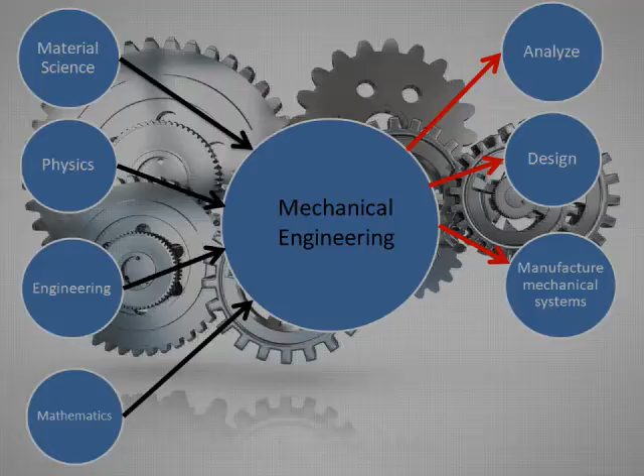As Professor Deshpande has already narrated, mechanical engineers have immense opportunities to work in various fields. I would call the role of mechanical engineers like common salt in any food. Without it, the food is incomplete.

To give you some examples, the usage of composites is the need of the hour. Composites play a decisive role in conservation of material, lightweighting, and cost cutting. Mechatronics is the technology combining electronics and mechanical engineering.

Robotics is a subset of mechatronics, which Mr. Sani Pathak has already explained in his presentation. Nowadays, we talk only about robots. It has helped mechanical engineers in reducing mistakes, resulting in high productivity, etc.

Nanotechnology, as the name suggests, is about anything small. For compact design and faultless performance, nanotechnology is used.

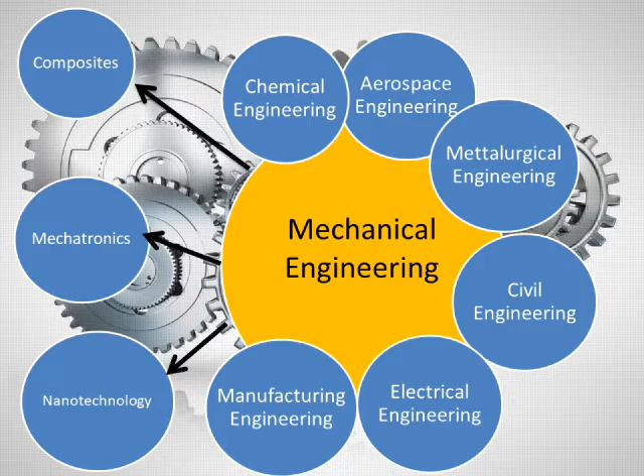If you see other engineering streams, mechanical engineers are present in every field of engineering, be it chemical engineering, where machines will not work efficiently without a mechanical engineer. Similarly, in aerospace, civil, electrical engineering, mechanical engineers play important roles.

When Dr. Ajay shared that SGT has decided to incorporate robotics, AI, ML, electric vehicle, etc. in the curriculum of BTech Mechanical Engineering, I found that the decision was very, very appropriate in the current scenario. As Professor Deshpande pointed out, those job opportunities of mechanical engineers in the next 4 years, the decision of updating curriculum was the need of the hour.

Let me take you for a tour of automobile engineering, which is a major branch of mechanical engineering and Industry 4.0. All of us are aware about the dependency of India on imported fossil fuel.

To reduce the impact of foreign currency outflow and reduce pollution, the current Transport Minister of India, Mr. Nitin Gadkari, has proposed various measures. One of them is the usage of biofuel, meaning alcohol and biodiesel.

The worldwide projection of energy in 2040 shows an increase in biofuels, increase in electricity, which is for battery charging of EVs, increase in gas consumption, CNG, LNG for domestic and industrial use, and reduction in oil, that is petroleum.

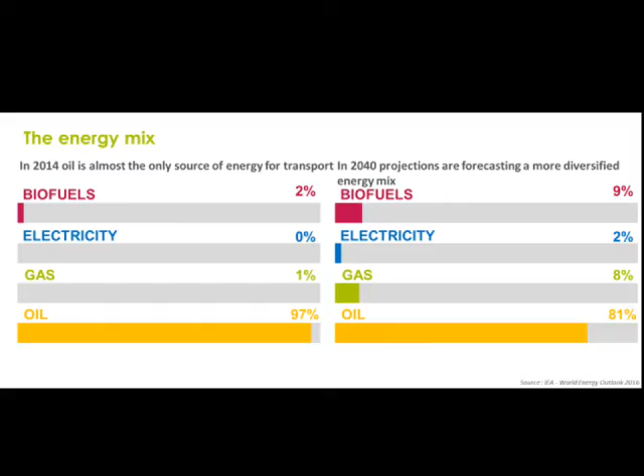Now the question is why we're trying to reduce our dependency on oil? Barring cost, the other most important factor is pollution. Due to oxygen content in alcohol, it helps in reducing the pollution. The conventional ICE, that is IC engines, powered automobile is causing an imbalance in the atmosphere due to pollution.

We know to offset the increase in global temperature, all major countries have initiated steps to reduce the earth's temperature by 2 degrees centigrade. If we switch to ZEV, that is zero emission vehicle, the impact of tailpipe emission of CO2 and GHG shifts to emission from electricity generation, coal, furnace oil, etc.

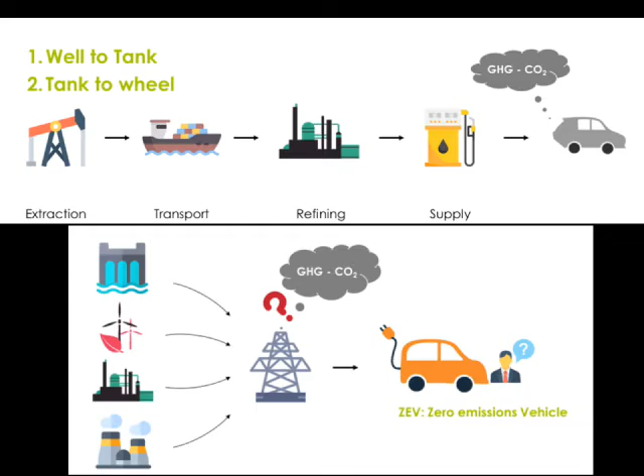The initial focus on reduction of vehicular pollution was for PM, which is particulate matter, UHC, that is unburned hydrocarbon, and NOx, for which catalytic converter, ammonia injection, particulate filters were developed and implemented. After achieving the status of complete combustion of pollutants, the present efforts are to reduce CO2, which has a global impact, that is climate change, increase in earth temperature, etc.

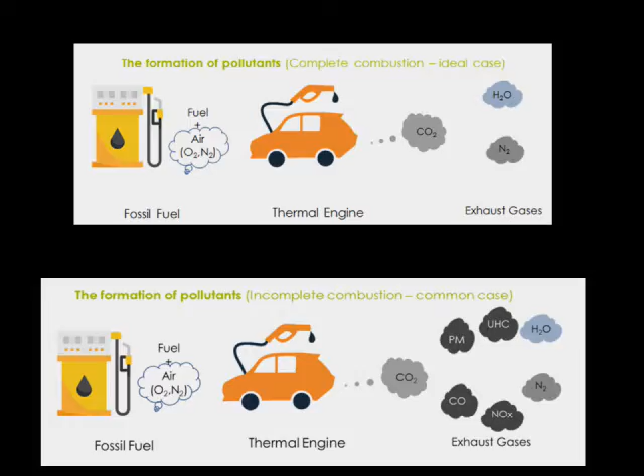To reduce emission from electricity generation, we need to generate electricity from renewable sources like hydro, wind, solar, etc. We know in India, to get the approval of building a plant, you need to have a provision to install rooftop solar cells and generate electricity, either on grid or off grid. Electricity from wind energy is developing at a faster rate all over the world.

Now let's talk about hybrid. The dictionary definition of hybrid is a thing made by combining two different elements. We will restrict our discussion to hybridization of automobiles.

Hybridization has been done to combine the trustworthy ICE power and electric motor. A conventional car is propelled by ICE, which runs on petroleum fuel. An electric vehicle is powered by battery. We will talk about different types of batteries later. The battery is connected to a power control unit where the battery voltage is increased to run the electric motor. The electric motor is coupled with the trusted transmission assembly of conventional automobile, and the vehicle is propelled.

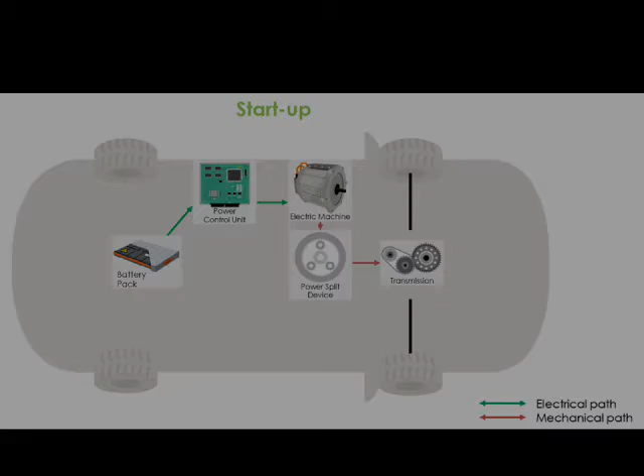In hybrid cars, these two technologies of ICE and EV are combined, and a power split device is introduced to propel the car either by ICE or by electric motor or by both, depending upon the configuration design. In startup situation of a hybrid car, electric motor is only used to overcome the inertia of rest. In normal cruising, both ICE power and electric power are utilized for propulsion. In acceleration mode, ICE power is used to run the electric motor in addition to the battery power.

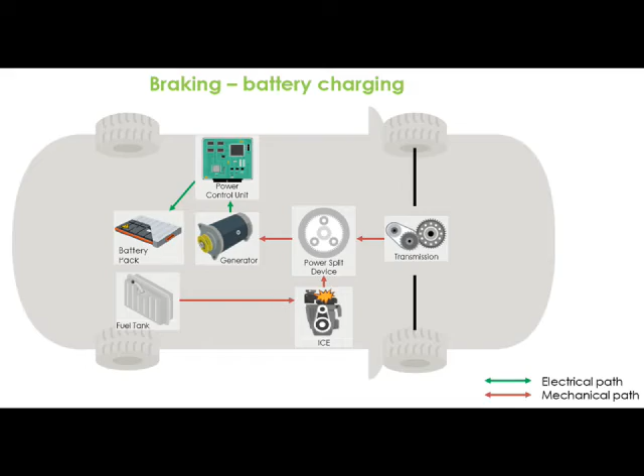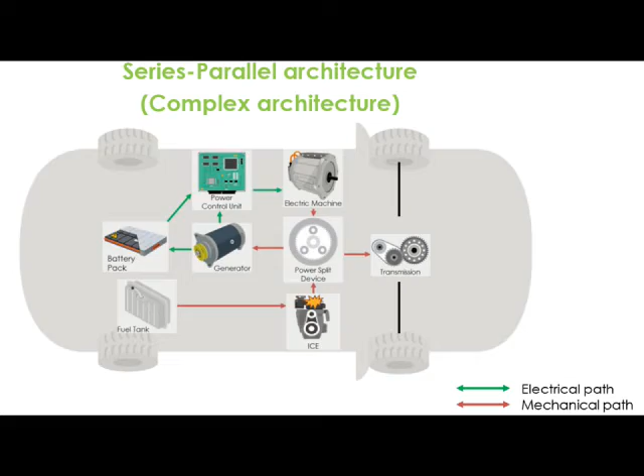Plug-in. As the name suggests, you need to charge the battery by plugging in to an electricity source. Stop and start capability, which is very popular in India. Start and stop system automatically shuts off the engine when the vehicle stops. The system then automatically restarts the engine when the car is again ready to drive off.

Regenerative braking, we have already explained. Electric propulsion capability: when the electric motor derives its energy either from battery or from electric generator, which is powered by ICE. High voltage battery, which is more than 200 volts - this is achieved by arrays of batteries connected in series. Embedded battery charger and onboard battery charger, which keeps the batteries in fully charged condition.

Examples: plug-in hybrid - Toyota Camry, Toyota Vellfire, Honda Accord, Lexus Hybrid. The examples of full hybrid: Volvo XC90, Toyota Camry, BMW 7 Series, MG Hector Plus. Mild hybrid: BMW X3, Skoda Octavia, Range Rover, Honda City, Kia Stonic. Micro hybrid: Hyundai Elantra, Honda HR-V, Hyundai Kona, Tata Hornbill. Maruti has got Ertiga, Ciaz, S-Cross, Baleno, XL6 configured for micro hybrid.

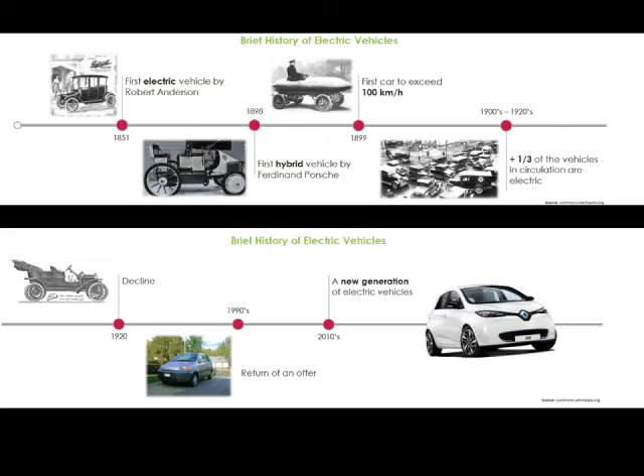If we refer to the history of electric vehicles, way back in 1851, the first electric vehicles were introduced. Till 1920, EV had a field day. After that, when petroleum industry got fully developed, ICE replaced EV because of abundance of petroleum. In 2010, because of atmospheric pollution, the present generation of EV started, and now auto industry is talking about electric and only electric. Since the battery technology is a key factor in EV, the age-old lead-acid batteries are being replaced by nickel metal hydride and now with lithium-ion batteries.

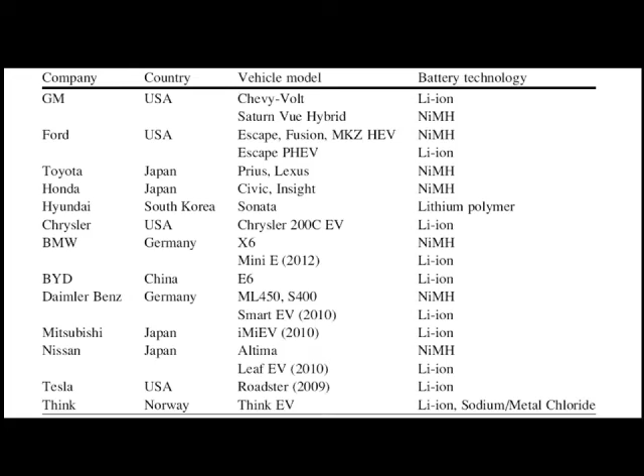As new technology will have teething trouble, EV is having challenges. The major constraints are insufficient drive range - a full tank car can cover 1000 kilometers, but a similar size EV can give maximum 400 kilometers. High cost, since the usage of high-end electronics are more and more, and of course the high battery cost. Long charging time, average 8 to 12 hours for full charging.

Improvements: Lithium-ion battery technology is fast improving with high energy density and battery cooling to prevent fire during battery charging. Cost reduction: since the volume of production is slowly increasing, resulting in cost reduction. Electrical component improvements: by using military grade technology, the reliability factor is being steadily improved. Low cost, strong, reliable, lightweight components - by utilizing the concept of composites and improved materials, this feat is being achieved.

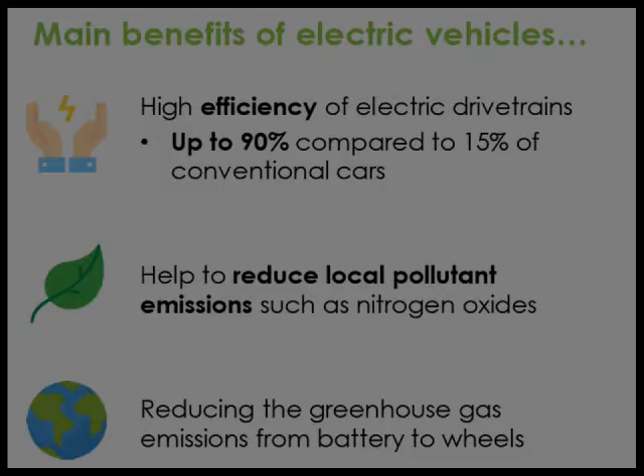Artificial intelligence. The dictionary definition is the theory and development of computer systems able to perform tasks normally requiring human intelligence, such as visual perception, speech recognition, decision making, and translation between languages.

The obvious question by the mechanical engineers will be, this is not my cup of tea, this is the domain of computer science students, what am I going to do with AI and ML? Dear students of mechanical engineering, you cannot confine yourselves within the standard curriculum of mechanical engineering. This is the era of cross-functional activities. You have to keep yourselves abreast with this cutting-edge technology to remain in the race.

This video is being presented to you not for advertising any particular model. This is just to show you what kind of technological marvel we will be seeing on Indian roads in coming years. If you want to be associated with this kind of technology, better learn it now.

And welcome to the exciting world of MG. A few days ago, we took you on an exciting journey with AI inside the MG Astor. Today, we will take you further on this journey by revealing the amazing new Astor. So first, a quick recap.

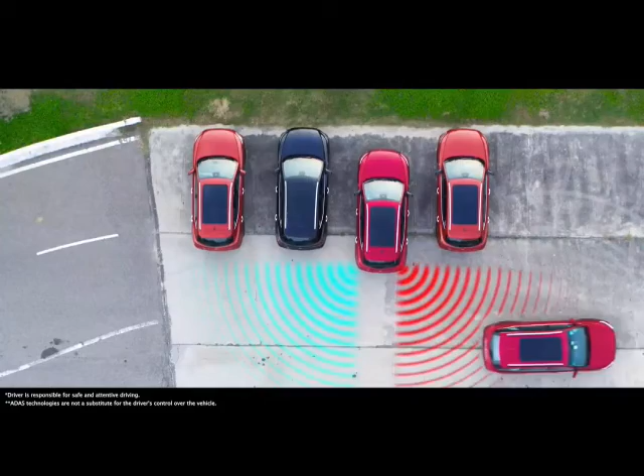Autonomous Level 2 also enables rear drive assist, which monitors the surrounding environment to eliminate blind spots. It includes rear cross traffic alert, blind spot detection, and lane change assist. Let us show you how rear cross traffic alert works. As you reverse your Astor, this feature detects cars which might be approaching from the rear left or rear right but are outside the detection range of reverse cameras and rear parking sensors. This can save you from a possible hazard by giving you timely alerts.

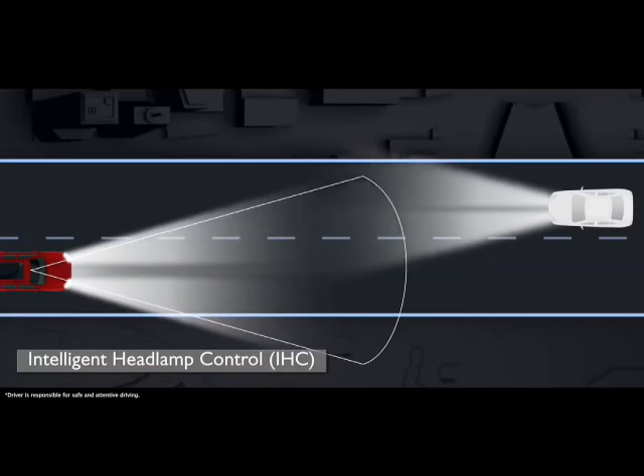Astor also has intelligent headlamp control that activates and deactivates the high beam of the headlamp depending on the oncoming traffic to prevent the situation of blinding.

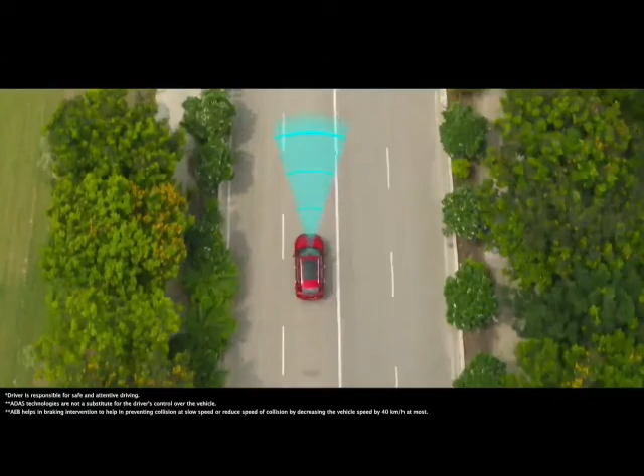So let's move on to the next feature, automatic emergency braking. One of the biggest risks on the road is the uncertainty of other vehicles and pedestrians. Astor's automatic emergency braking keeps you safe even in such uncertain situations. If there is a possibility of collision, the Astor gives a forward collision warning through a visual and audio signal. If the driver still doesn't take any action, AEB will apply brakes, reducing the speed by up to 40 km per hour, or come to a complete stop if you are below 40 km per hour. Whoa, that was close. But Astor handled it well.

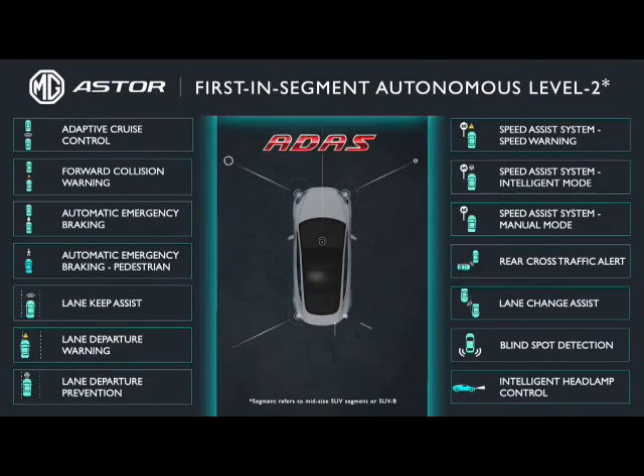So that's autonomous level 2 for you. We are confident that in India, the Astor will redefine not just the segment, but also the future of mobility. With AI inside, it has a personal AI assistant, autonomous level 2 features, and it is the first car to offer services and subscription under car as a platform.